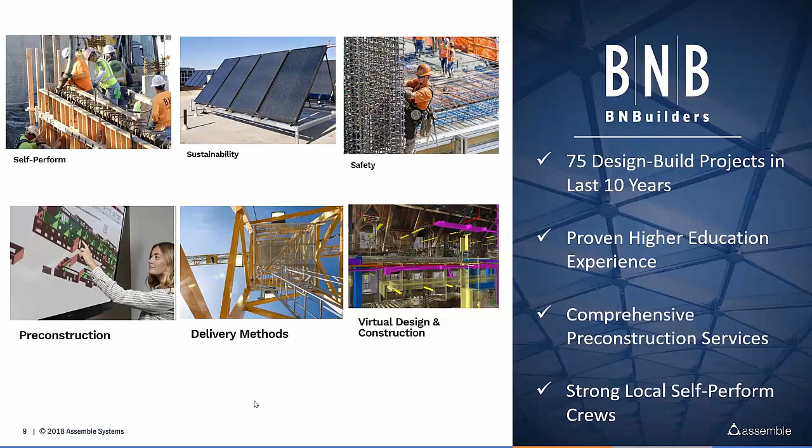To quote a former colleague of mine, I stand on the shoulders of giants. Where most of us are familiar with the plan, do, study, adjust cycle, this is on my coat sleeve, so to say, in terms of how I approach doing new things. It's really my rock and my anchor, to guide me around how to do the very best of everything I'm doing, and to remind myself that there's always a way to do it better.

So I'm an evangelist when it comes to process improvement, and this is where it starts. I like to talk about this a lot as well. From my background and perspective, in that planning stage you're adding information. You have information that creates options, which then ultimately drive decisions, and that cycle continues. Those decisions create more information, and the focus here is on what is that information you're working with, studying, etc.

This is a quote I can probably attribute to two, maybe three different people, but it's sort of spun out of the current innovation—call it craze or focus.

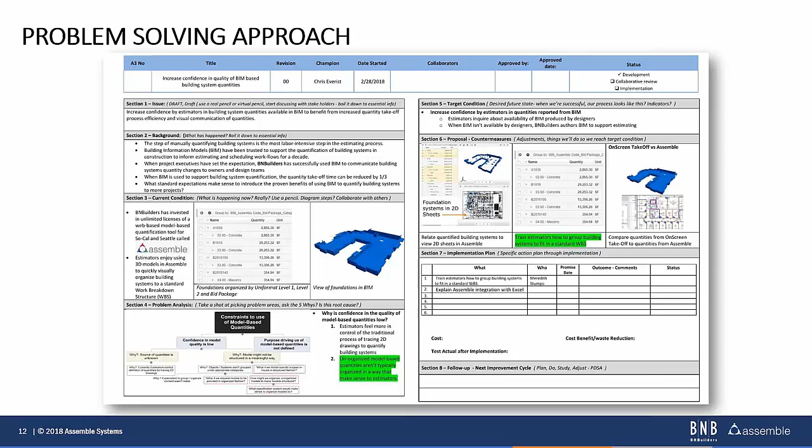So we owed it to ourselves to study why. There's a couple problems, but the one I wanted to focus on today is that oftentimes when we get model-based quantities, it's a mass dump or export from one platform or the other, and the quantities just aren't organized in a way that is really useful to an estimator, and they don't have time for that. What are we going to do? I think Assemble really offers an elegant solution to being able to touch the model, organize the model, and be able to sort it in a way that's meaningful to the end user.

Jumping in here, I think what you're describing I correlate in my mind back to a 2D takeoff process. What you're doing when you dive between a floor plan, possibly an elevation, some details or section views, you're conditioning that data. You're creating takeoff conditions when you do that, and you need to bounce around in a lot of different places of the document set to organize it in your own mind. So this is a correlation to that, that model comes in.

It's design data. It's a lot of information that you've got to sift through to get exactly what you want. And Tim, you really hit problem one, which is that there's something about turning the pages in a set and tracing 2D drawings where you're learning about the project, and that step is so crucial to getting familiar with the project and understanding what the model-based step is for doing something just like that. No, that's great, thanks for bringing it up.

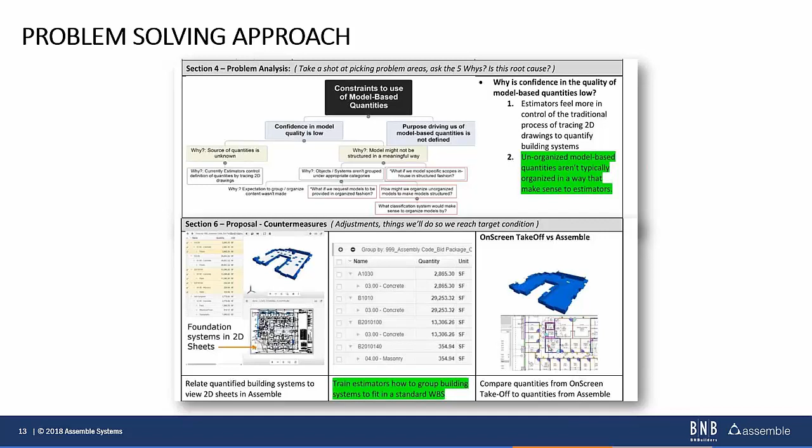We're using Assemble's words, condition the model so we can sort the data in a way that's meaningful to us. And then there's a model adjustment step - maybe the geometry isn't broken up in the locations that really make sense. So the goal here is to reduce some of that rework. This is really, I think of it as a bank vault in a way, that really protects the value that I and my team have invested in the process. A lot of that conditioning is safe now - I can take the conditioning I've done in Assemble and sync it back to new versions of the model.

And that's truly priceless. I recognized that immediately when seeing Assemble for the first time, and it was a no-brainer to invest in the platform because it did offer me that true value. So I didn't have to flush all the work away.

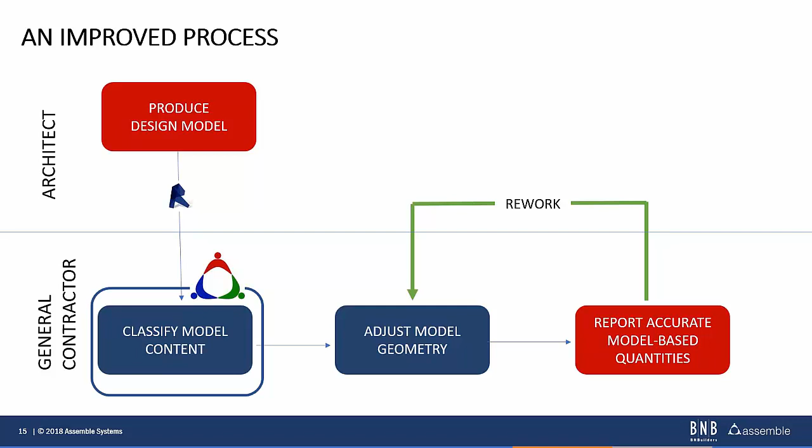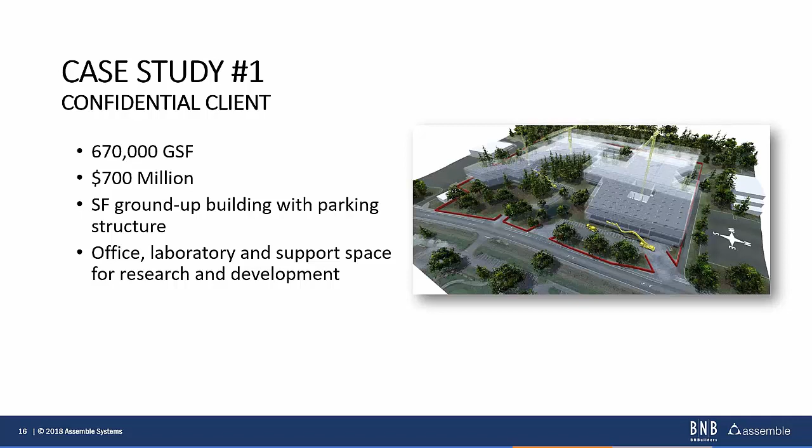It really forced me to challenge some of the workflows I've gotten comfortable and reliant on, and that's why I love working in construction. No two days are the same, and you're solving different problems all the time. So I wouldn't have it any other way.

Just to keep in mind the previous process diagram, enter Rhino. So no more Revit, now we have Rhino. So now I'm exporting an IFC from Rhino and pulling that IFC into Revit, and really broken that connection to Assemble. So I'm back at kind of square one in terms of the need to rework data.

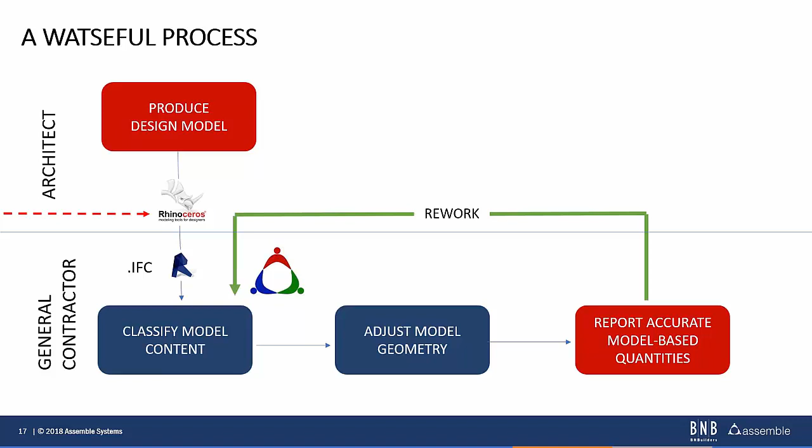But we did get the Rhino model into Assemble after jumping through a couple of different programs, relatively painless. And this is what the data looked like. Real similar to that mass dump export of data from yesterday, or yestertime, as my 3-year-old likes to say.

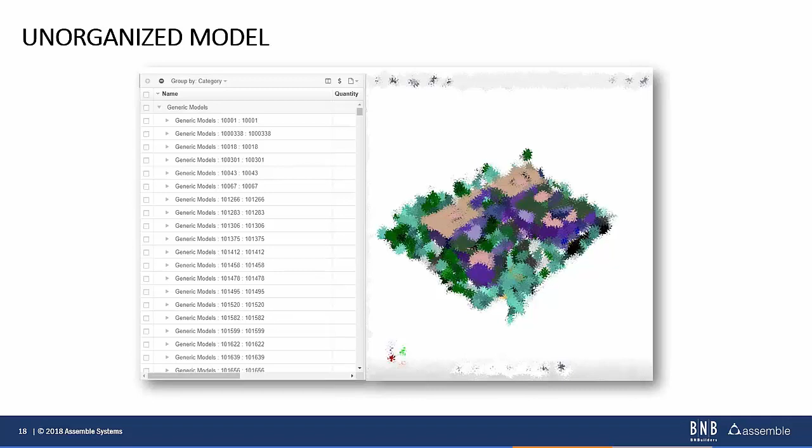Yeah, actually, real quick before we jump to this slide, I do want to say that he did not receive the geometry looking like this. This is blurred for confidentiality purposes, but it's not that it came in as a finger painting into the system. Exactly. Thanks, Tim.

So the steps to begin to classify or condition the model is to take advantage of some of Assemble's new features, which is adding your own Assemble properties. The Assemble properties are a great way to lock up all the value you're adding to the model. So you can see I added Uniformat level 1, 2, and 3. And then I set up a view I called hide assigned, to hide any content I've assigned at, in this case, Uniformat level 2.

So in the next slide, you'll see a video playing through what it's like working in that view, and this is to give me some confidence that I've assigned everything a code.

Before we jump ahead to that video, I want to give a shout out to the Assemble development team. We've done a lot of work recently on enhancing how Assemble properties work and what you have available. We just recently released the ability to add quantities or numeric properties rather than just text properties. We also gave the ability to do grouping so this list of properties can be organized into groups just like your model-based properties can.

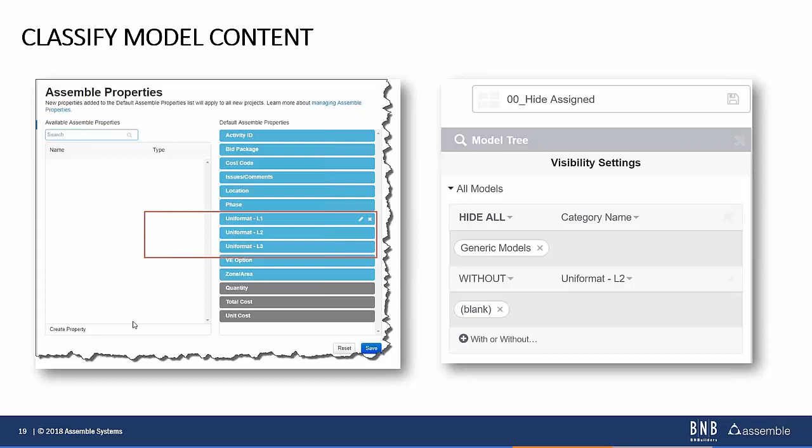And in the near future, we're currently working on the ability to define data hierarchy, like an assembly code where you have those Uniformat values, they can roll up to A, A10, A1010. We'll also be giving a flat list of predefined values, maybe 10 values you want as a specific set of information. So all of that is happening around what you're going to be conditioning, and all those features would have been extremely valuable in this workflow.

So what you'll see me doing is clicking geometry, assigning it a code, and then it disappears. So the goal is to have an empty workspace, or otherwise have everything assigned to a code.

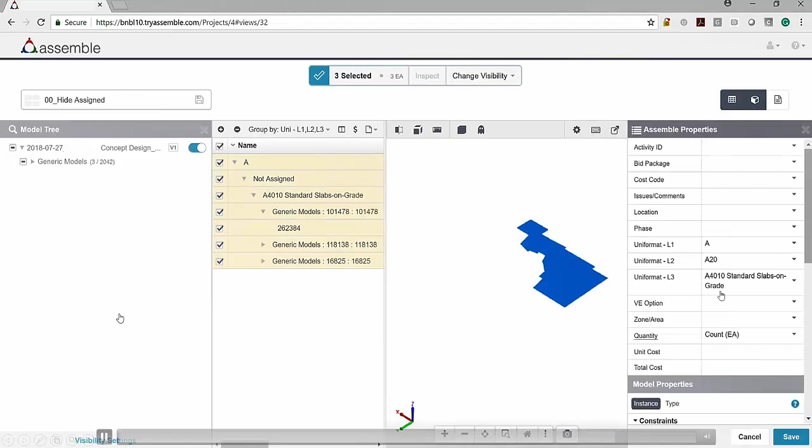Pretty simple workflow, but if we have any architects on the phone, it's a lot like highlighting red lines. It's a smart process, and I'll say that process too is ultimately flexible, where I know some people particularly like to color code instead of hide. That process is flexible to fit a lot of different cases where you want to visually change how you're organizing that conditioning.

Yeah, and there's still waste in the process. It's certainly available for improvement. And as Tim alluded to earlier, really what we're reaching for is more integration with the entire team, really priming ourselves and preparing for the opportunity to pull each of the stakeholders into the fold, into the process, and maybe get the architect to implement some of this data structure. Having spent a lot of my time sitting in the seat of an architect, I understand that they have their own problems to solve and probably don't want to think about what's important to the project from a bigger perspective, and that's okay.

But it sure would be great if we can all look at things from the big picture, and we will constantly be striving for that. I feel like I sound like I'm in a Southern Baptist church right now, just constantly saying amen to the things that you say. But I think that's key. I think that communication and partnership on a project is absolutely what we need to strive to do, and how that information is flowing between one another across the entire project team is what ultimately drives a successful project.

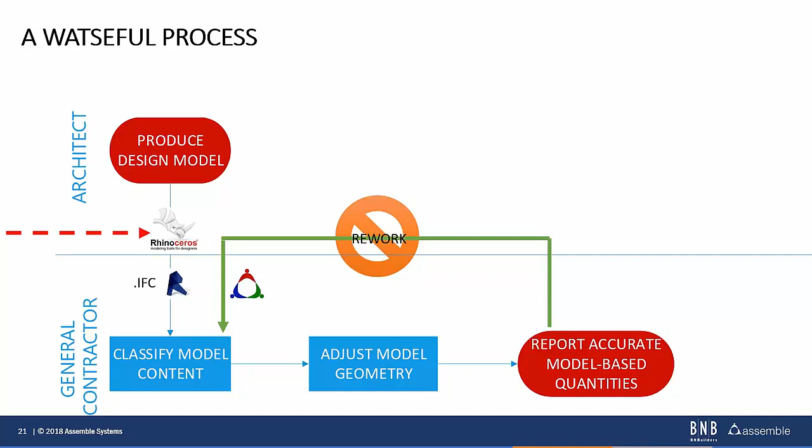So this is a tool that's available for Rhino, and this is a way to add some intelligence to the IFC Export, something that we're looking at right now, and maybe it's a tool that we'll introduce to the architects so that they can start exporting some IFCs with some rich data. So again, there's always opportunities for improvement, and I'm always primed to recognize them.

So, as much as we talked about conditioning in the sense of bringing the information that you have into the classifications you need, I would say this tool and this process you're talking about is like a pre-export conditioning, where you need that specific information to drive decision making. Exactly, because the export to the IFC really strips all the data out.

Then Chris, any last comments? We're going to be diving into your second workflow and move through that pretty quickly here, but any last comments on this initial workflow in this project? Only to be nimble, be ready to pivot and change directions, and just be open-minded to the process and the way people want to work. And I think Assemble really is a great tool that supports that flexibility.

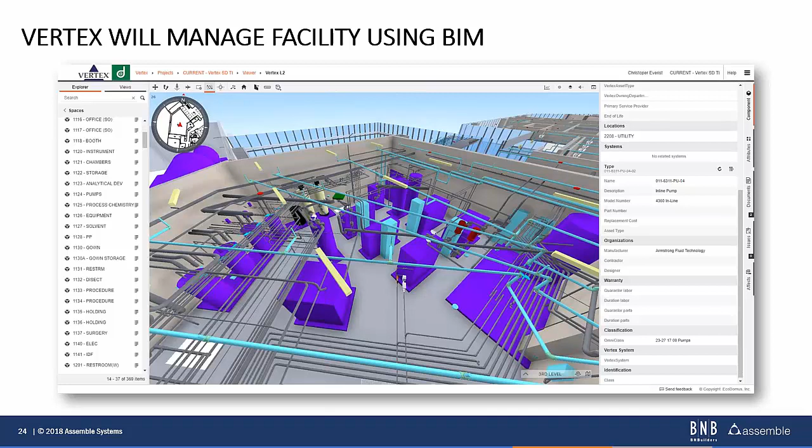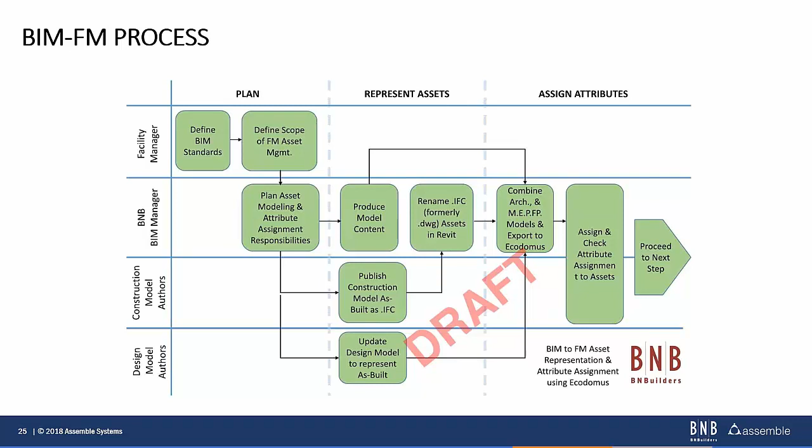There's a planning step where we're defining scope, there's the modeling step and how different modeling platforms get exported and translated to feed into this platform, and then finally a step simple enough, assigning data to the assets. Hey, I've got Assemble, I got this under control. I'd like to talk a little bit about how we use Assemble to get that step under control.

So the challenge here is, I'm the guy with the glasses in the middle, receiving models and making sure the models and the data are lining up to where they need to go, that the data is correct as it lines up to this big fat blue circle in the middle, defining what assets are valuable, what attributes are valuable, and are we filling them out?

And is it getting to the right version? Is it getting to the right content? It's a daunting task. To add to that, is it in a format that's useful for the facilities manager at the end of the job? Yeah, that's also a big hurdle, to make sure what you're doing is transferable.

Absolutely, and that format was Revit, and it kind of blows a lot of people's minds because we know Revit isn't always used for fabrication modeling, though it's gotten a lot better in recent years. But when we started this project, AutoCAD was used, and there was a fair amount of remodeling that had to take place, and budgets that were blown as a result.

It's painful, especially when you have to deliver that news and balance keeping promises against unknowns due to technology not being at a fully compatible point. It's a tough line to balance. Assemble really was a flexible tool that helped me put some ointment and a band-aid on some wounds along the way. I don't want to dramatize it, but you can tell I really care about delivering on promises for our clients, and Assemble was kind of a beacon in a foggy day sometimes. So I'll show you, walk through the steps.

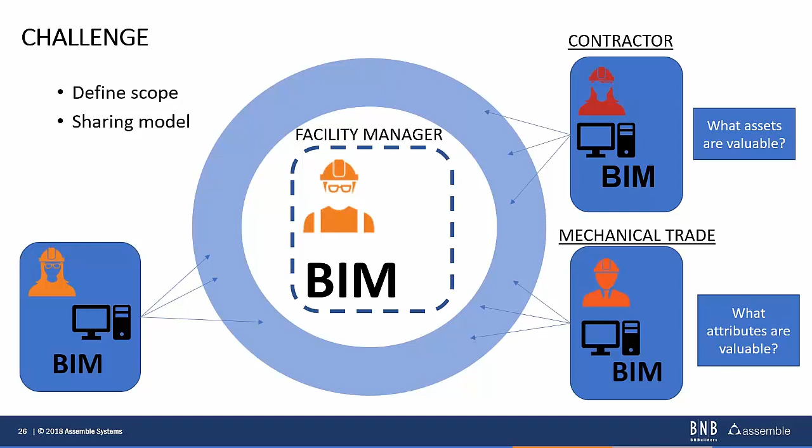Sure, that's good to know, valuable information. As you mentioned, there are workflows today that still require some rework, and there are avenues Assemble's looking to address for different pieces of that. Yeah, there's a lot of moving parts. Right, as one improves, it demands improvement from the other one. It's just a life puzzle, isn't it?

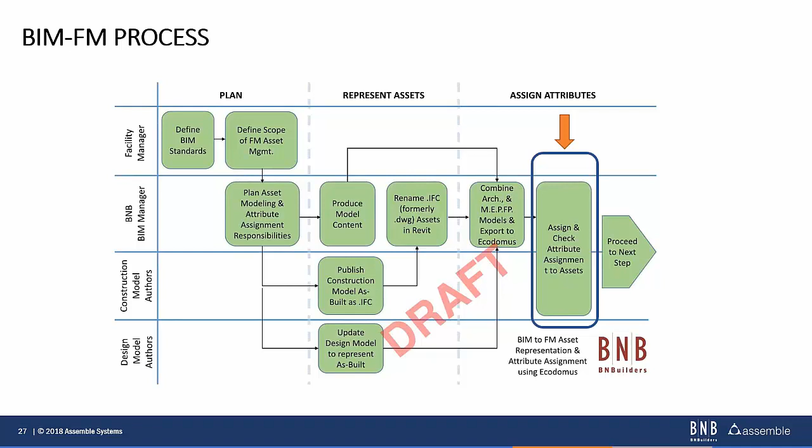Yeah, absolutely. And again, back to the same comment you said earlier, as contractors we are ultimately, day in and day out, problem solvers. So let's take a look at this step that I'm pointing to and circling.

The mechanical and plumbing trade, on the other hand, preferred a different process, namely because a Revit technician was more expensive than a data entry resource or person. So what I got to do was create several views in Assemble. I'll show you them in a moment, that were defined according to filtering out the different Omniclass classifications I set up in Revit.

I exported an Excel spreadsheet, handed it over to numerous Excel spreadsheets, maybe a little less than 100. They filled them out, I received them, imported those spreadsheets into Assemble, and then synchronized the Revit model from Assemble. It was initially just, hey, let's try this, and it worked on the first try. I was thrilled, so it was reliable.

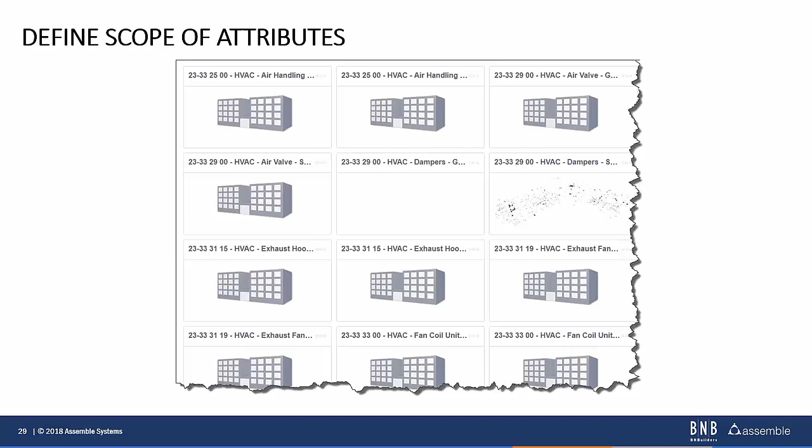This is just a quick snapshot of maybe a tenth of the Assemble views I set up that I was exporting spreadsheets from. This is what one of the spreadsheets looked like, and this is an idea of the kind of data we were collecting.

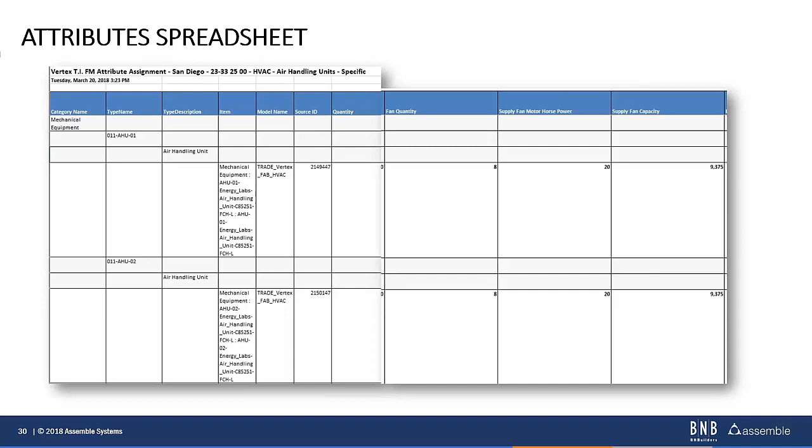Fan quantity, supply fan motor horsepower, supply fan capacity - we're talking 15, 20 different attributes for, I think, like 60 asset types. Also a ton of data.

That process you're talking about is certainly something we're interested in - making it easy to invite and utilize the investment you've made in Assemble across the team more broadly. It's good to see that's where you're wanting to go, and that's where we desire to go.

But Chris, these two different workflows are invaluable for us to know and share. It's focused on collaborating across the entire project team to try and solve a problem and ultimately give better content, better turnover information to the owner at the end of the project. From Assemble and our whole team, we really do appreciate you taking time to share this today.